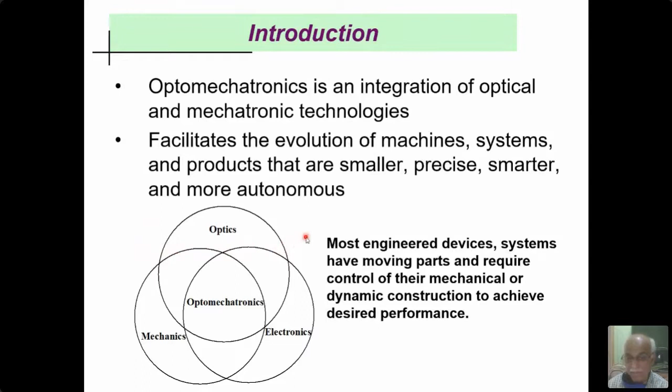There, electromagnetic based approaches, or in a very simple way we can say vision based systems or microwave based systems, etc., play an important role in this. So let us see how these optoelectronic systems have grown in the last century or so, how the mechatronics activities have also grown along with it, and how they are getting coupled with each other.

Now, that was one starting point, you can say. But slowly, mechatronic systems became much more important. As I told you, with microelectronics, microprocessors and microcontrollers coming into the picture, the systems started becoming much more integrated in terms of mechanical systems coupled with such microcontrollers, providing us a fast, precise outcome in terms of displacement, position, or some other functionalities.

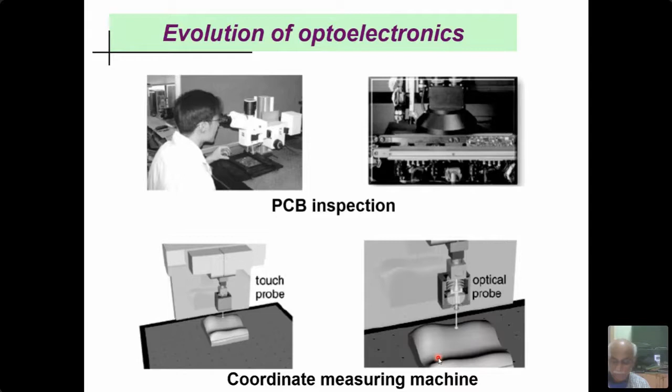So in that sense, the scanning becomes very fast. It's non-contact, so no wear and tear of the tool. Hence dimensional precision can easily be achieved in measurements. So this is another development which has taken place. Now, all these aspects I showed you in the previous slides are based on optical techniques.

Sometimes we use an optical source which interacts with the object, and the reflected signal, or in some cases the transmitted or absorbed signal, helps us determine the characteristics of the object. An optical detector can be used to detect either the reflected signal or, in some cases, the transmission signal.

One very simple way to determine the position or dimensional characteristics of the object is to use a light, and the reflected signal falls on the detector. If it is a point detector, it gives us information about one particular point from where the light is reflected. If the reflected light reaches the point where the detector is placed, we can estimate the angle. And indirectly, by scanning the light, we can estimate the angle or the surface

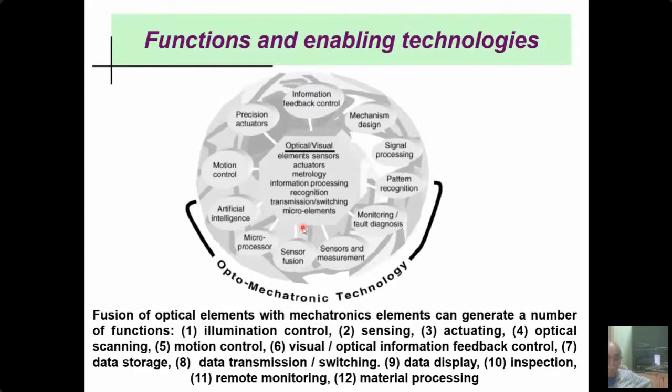The optical source is here. You may need some illumination control to see through the object, etc. Sensing, as I told you, we need optical sensors to capture the information. Then we also need some type of actuation; optical scanning is possible. Motion control is possible, visual optical information feedback control and data storage is also possible, and data transmission as well. Hence, this technology has lots of applications coupled with robotics, coupled with mechatronics, and hence the word optomechatronics.

Now, I would also like to give you some hint about the ways that optical systems can work with the material in order to characterize or capture some information. It may be using laser intensity, or it may be based on the directionality of the optical beam, or it may be based on the interference properties.

So interference characteristics of the laser can help us to determine various micro positioning movements using interferometry techniques, which I will try to explain to you after a few slides. So it's not only measuring the light intensity, but it also indirectly helps us to measure the phase difference and the optical path length difference, etc., using such interferometry techniques.

That means intensity, directionality, the optical coherence information, etc., can be captured using various types of optical based sensors, and it can help us to determine position in case of a servo system, a servo mechanism, or DC motor control. They certainly make use of such optical approaches in order to detect certain information and positions.

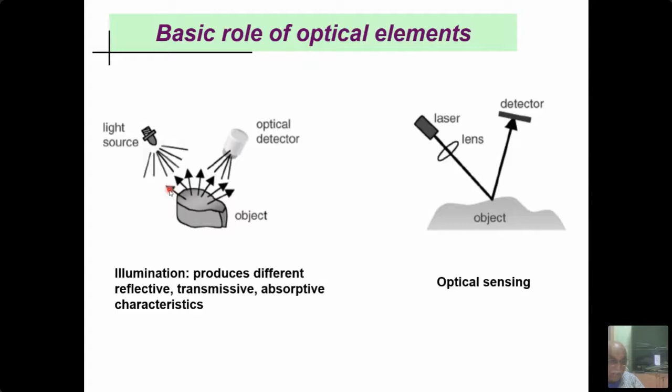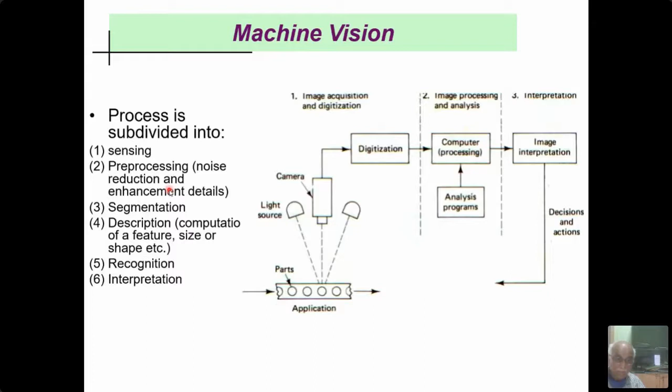That is through, of course, some type of approach, maybe absorption measurements, maybe transmission measurements, etc. But it's possible. I'll give you a simple example of that.

If I really would like to measure the characteristic of this weld part, we may have to do some mechanical testing, etc. However, when the weld process is on, we can still determine certain features during the welding process itself, which may give us some indication about what is expected, what will happen.

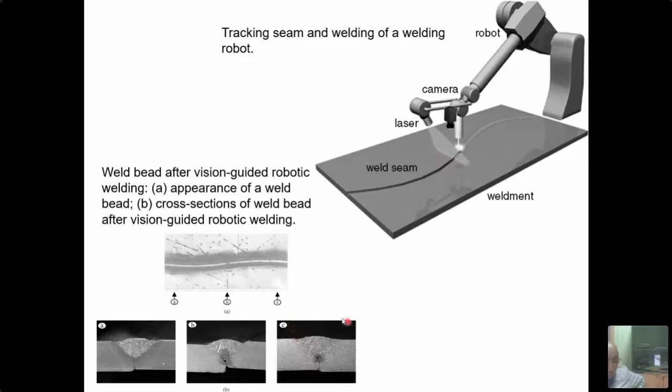And in this case, the light which is illuminating this object can be captured using the camera simultaneously when the weld process is on, and it will help us to determine some of the defects which are very difficult to determine. So the cross section of the weld bead after vision guided robotic welding can be seen here. Now it may be clear to you that the optical technique used in the previous case is basically to sense the characteristic of the weld which is being deposited here.

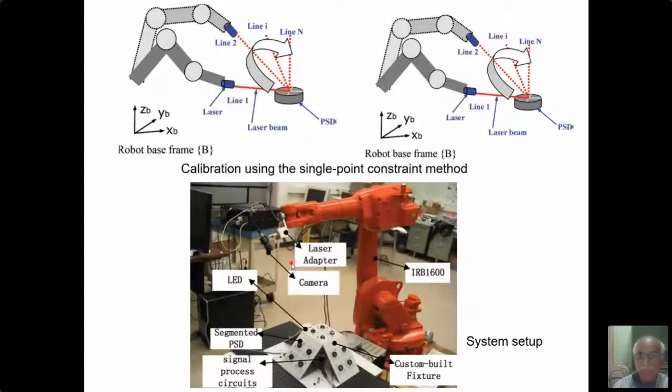And then we can do precise location, precise calibration using laser and position sensing device, or slightly rough calibration using imaging modalities, etc. So that is another application. So now you can see that we were right.

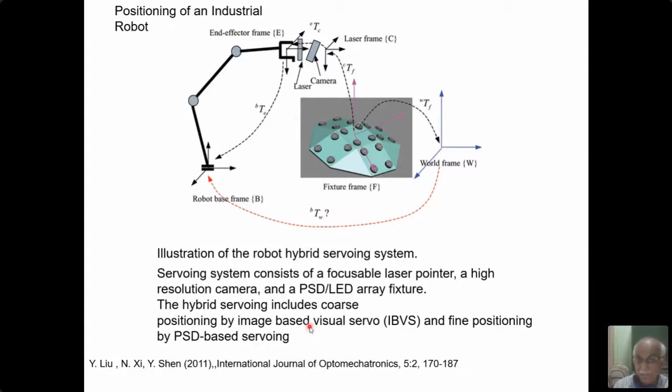You can imagine that we can make use of a system to observe process parameters. We can make use of the optical-based systems in order to build a micro assembly system. We can make use of such imaging modalities, etc., along with the lasers or optical LEDs, light emitting diodes, etc., in order to calibrate the robotic systems for industrial applications, etc.

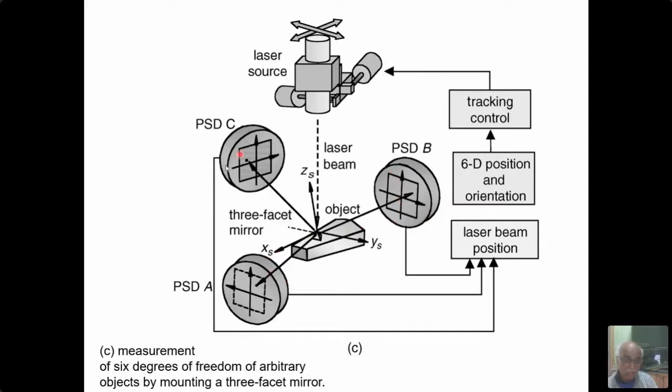Then this vertical or horizontal movement in either direction can help us to determine the surface texture characteristics, and precise measurement is also possible using proper position sensor devices, as well as placing them in all three directions to capture various information in terms of position and angular control. So all six DOF position and orientation control can be achieved using such a system in atomic force microscopy measurements.

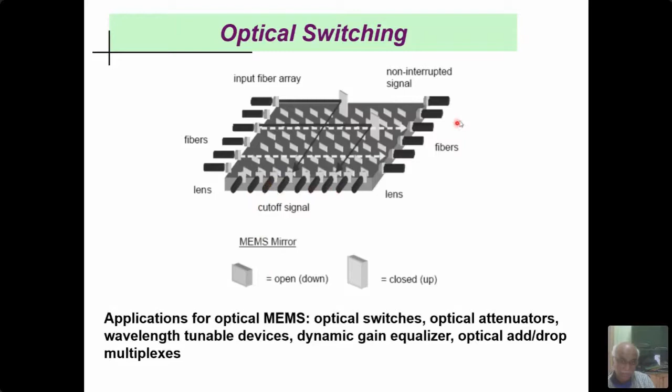I was talking about previously the mirror position, and the light from here will get positioned here. If this mirror is going to obstruct this line, it will get positioned here. Now, instead of this mirror, if this mirror picks up the light, then another position can be captured. So all this type of actuation is done, of course, through other means, piezo actuators or electromechanical actuators. However, optical techniques coupled with this allow us to transmit the data at different positions in XY stage. That's why this is known as an optical switching MEMS device.

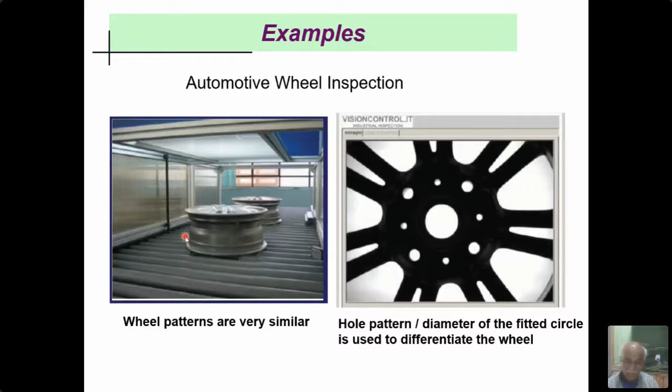This I will skip. You can even use online capture with imaging modalities in order to determine which particular wheel is being conveyed, and depending upon the assembly line requirements, a particular wheel will come and get assembled. But while it is moving, it will be judged whether the correct wheel matches the correct model of the car or not. So like this, there are a few more examples.

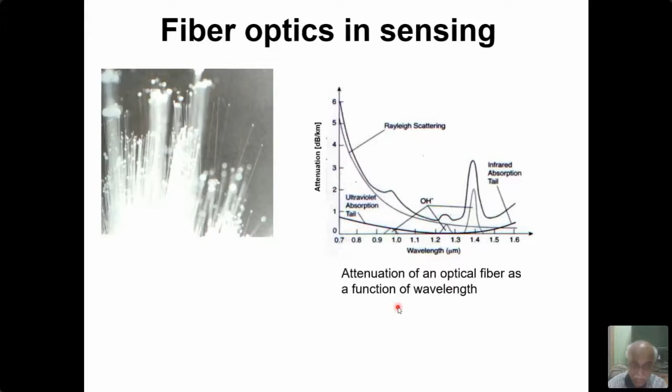I'll skip, but I'll come to a very important aspect of fiber optics based sensing. Okay, so before we go to this part, where optical techniques can be used in order to capture various other information, I'll skip this. I would like to come here.

I would like to just, sorry. Yeah, I know. No, I know.

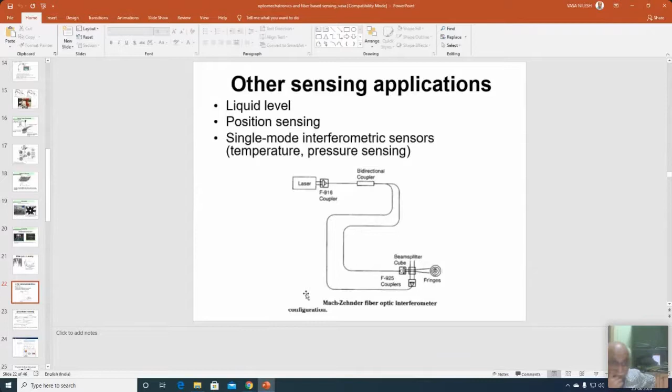Indirectly, we are trying to find micron level or nanometer level small changes along this fiber arm, which can help us determine the changes using the interference pattern over here. So the detector over here will help us determine if there is any change occurring. So this is one example. Such fiber-based systems are useful to measure temperature change or pressure change along one of these arms, etc. Okay, so very precise, very small temperature changes can be captured using this.

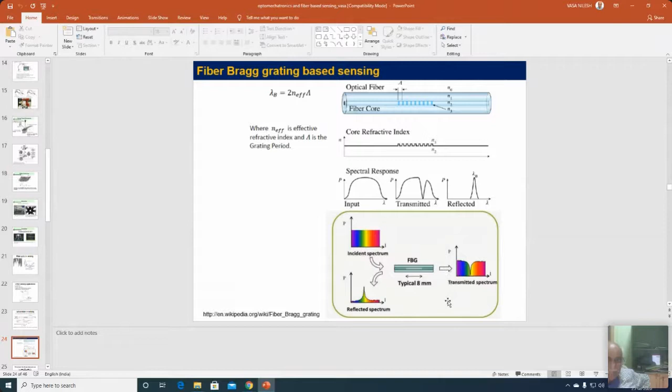So what you will see is one dip in the transmitted light and the corresponding reflection at the same wavelength over here. Now using this information, we can capture what the period of this grating is. Now if by any chance the structure is undergoing some deformation, the grating structure will change. Then the reflected light wavelength will change, because the Bragg wavelength will change as the grating period is changing. And hence the transmission spectra may change.

So we can have different grating structures, and accordingly different wavelengths getting reflected. And wherever there is a deformation taking place, that particular wavelength will shift by a small amount. And that means this is nothing but the distributed feedback it gives.

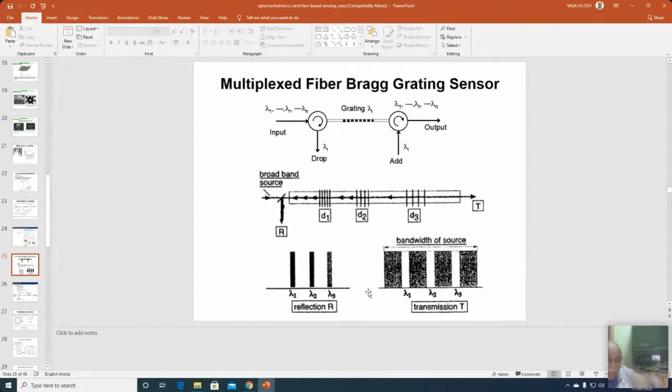I can capture the information from position 1 or position 2 or position 3 depending upon the grating period. Okay, so that can be captured. I can measure not only the stress induced, even the temperature difference in the material can be captured using this wavelength shift, etc. So I can capture some of the information which are not seen easily, micron level deformations, using such optical measurement technique, using optical fiber.

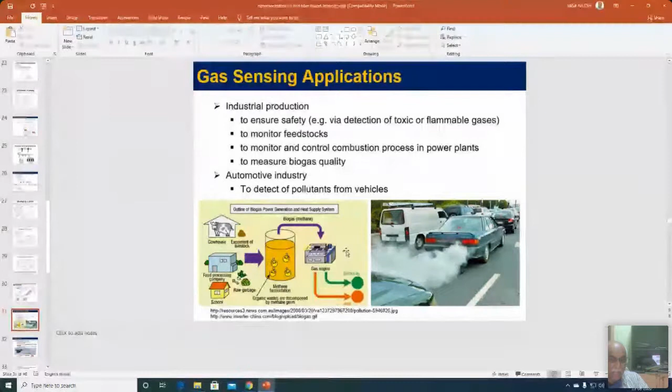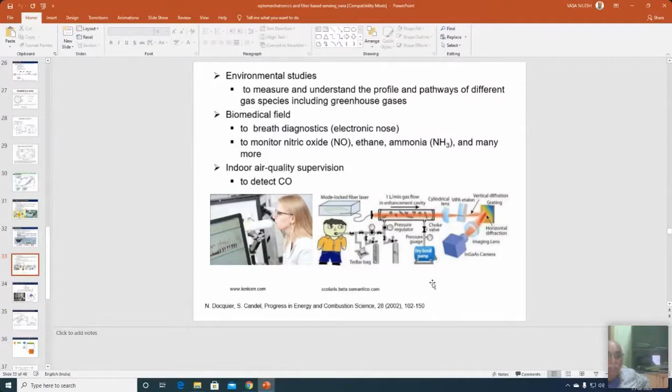Now coming to another application, I can also capture the information of automotive exhaust, power plant exhaust, or diesel engine exhaust, or in biomedical, human breath exhale. All this information can be captured, and we can measure concentrations of different species of the gas. Here, one example is about ammonia. If there is ammonia present, you will see its signature in the transmitted light. Depending upon the concentration of the ammonia, the transmitted signal intensity will vary, and that can be used to capture the concentration of ammonia.

Like this, we can capture the information of CO2 or methane in a power plant, etc. We can couple it with a piezoelectric actuator, change the fiber grating structure, and the wavelength which is getting absorbed can be captured by the spectrum analyzer. So there are tremendous applications of optical systems which can be coupled with various mechatronic aspects, and optomechatronic systems work in that way.

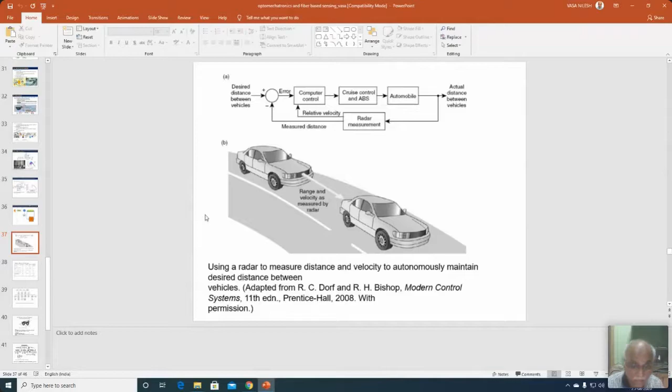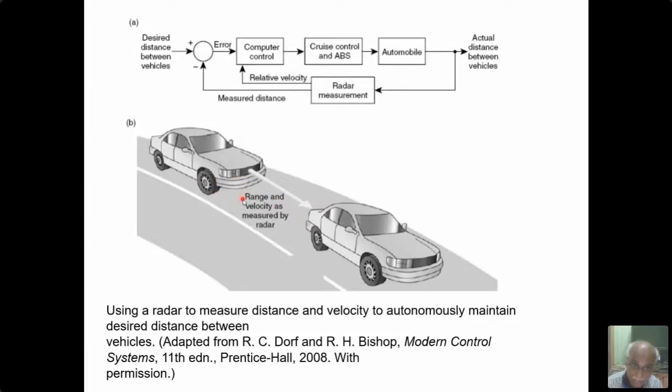Of course, there are a few more optical systems in free space. As you can see here, I'm sorry, I didn't put it in full screen mode, but you can use a radar microwave system or an optical system to capture the position of the vehicle, to avoid collisions, etc.

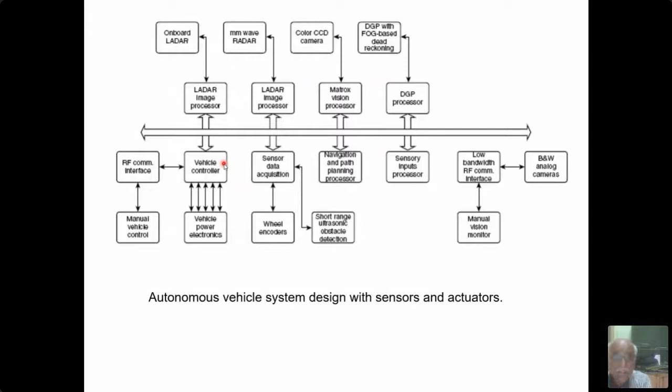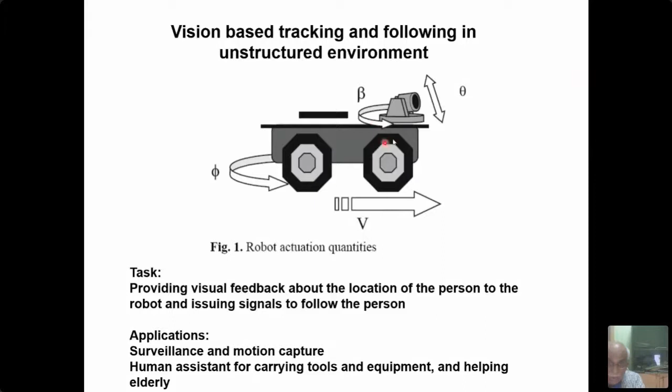You can make use of various other electromagnetic waves in order to capture the information, position of the car, position of the vehicle, side positions, etc. So we can use such optical techniques. We can use camera, and we can make use of optical sensors to position in different directions. We can use ultrasonic sensor to position with respect to the obstacle, and we can also use camera system to measure other positions.

Now we can make use of such mobile platforms for environmental sensing, for localization, by using laser finders, range finders, etc. So optomechatronics systems couple mobile platforms having servo systems, servo drives, etc. And then those mobile platforms go around along with laser range finders, optical sensors, and capture the environmental information, and accordingly provide the feedback to the system.

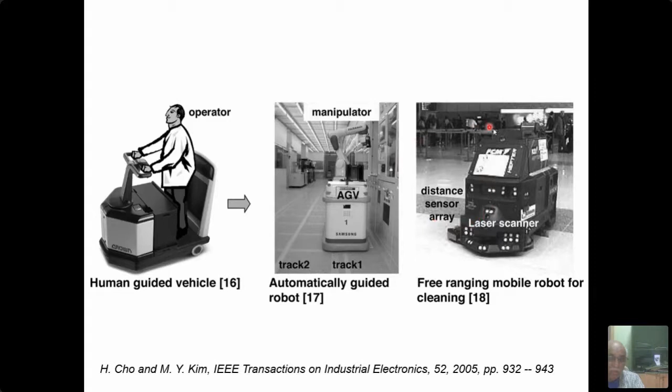This is another free range device, no automatic guiding. It has various cameras and scanners, so it can move around freely in the industry, and helps us for transport applications, workpiece movement applications, etc. And this is another extreme application.

So if it is silicon, you will see some silicon emission lines. If there is iron, you will see iron emission lines. So that means we can characterize the rock structure, soil structures, etc. in unknown terrain, unknown territory, by coupling the laser systems not only for mobile operations, but even for analysis of the environment.

So in short, we can integrate optics, lasers with mechatronics and optical sensors coupled with optical fibers, and use it for various mechatronics applications, not only in stationary conditions, but with autonomous vehicles, etc. So thank you very much for listening to me, and I hope you got some idea about how optical sensors, optical sensing devices are used for various such applications.

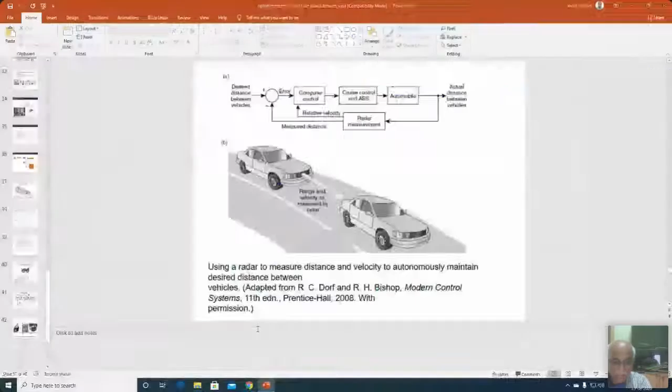Is camera required for robot? Many sensors and actuators are used to build it. Then why do we need camera? You see, the two applications which I showed you, one is to calibrate the camera system itself. So we can make use of a position sensor or a point sensor for positioning. However, sometimes redundancy while doing robot calibration helps in improving the positional accuracy and precision. That's where we can use such camera.